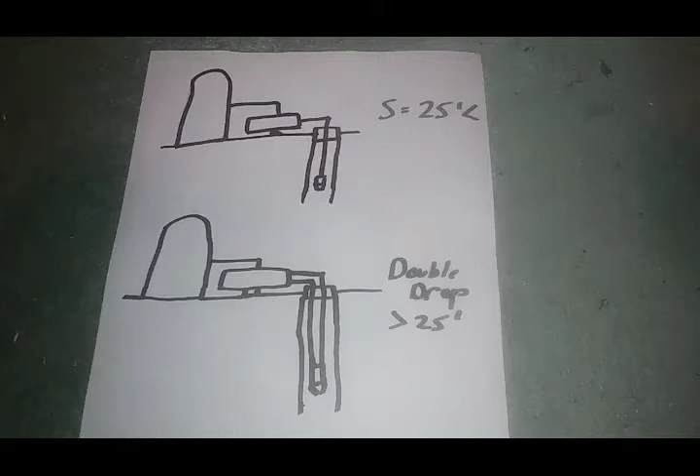All right, here we go again.

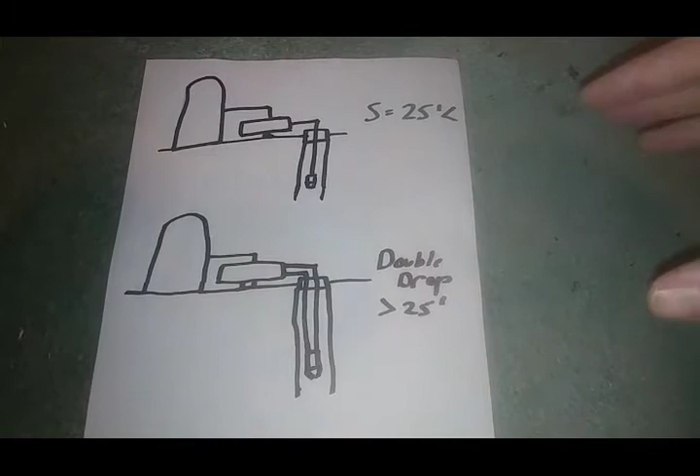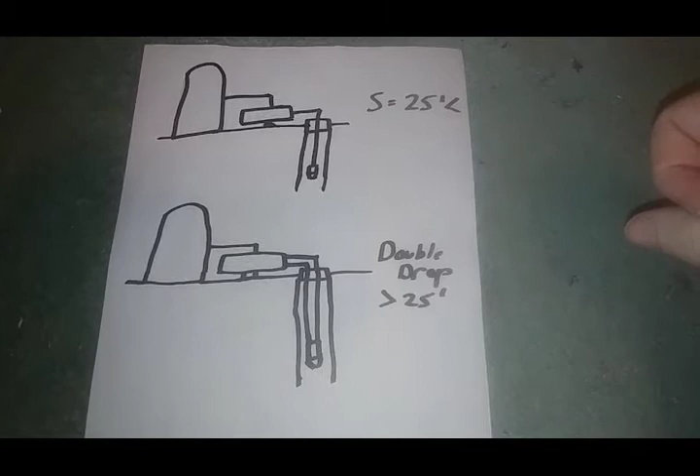So we're going to talk about jet pumps just a little bit. This actually came up today at the counter. I want to thank young Master Dylan Howell for the idea to do this, because a customer had called in and spoke to one of the other guys at the counter about jet pumps, and the topic got brought up. He said, I don't really know how those work. So I kind of walked him through it, and I thought, that's a great idea, I should just do a video on that.

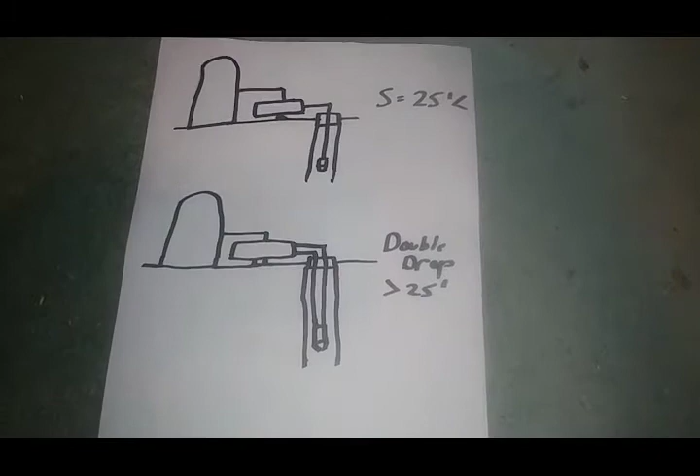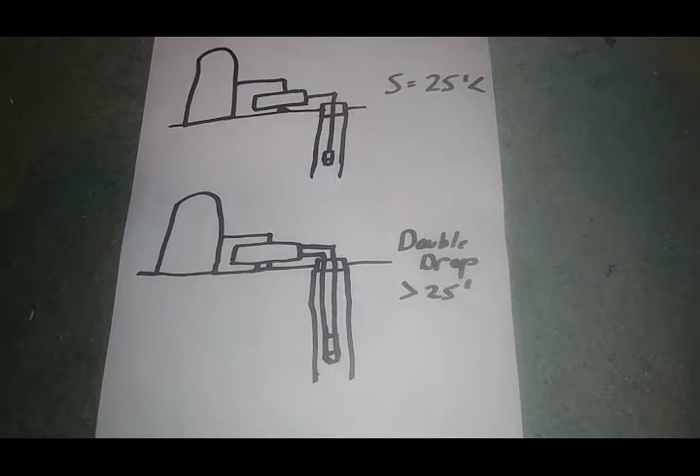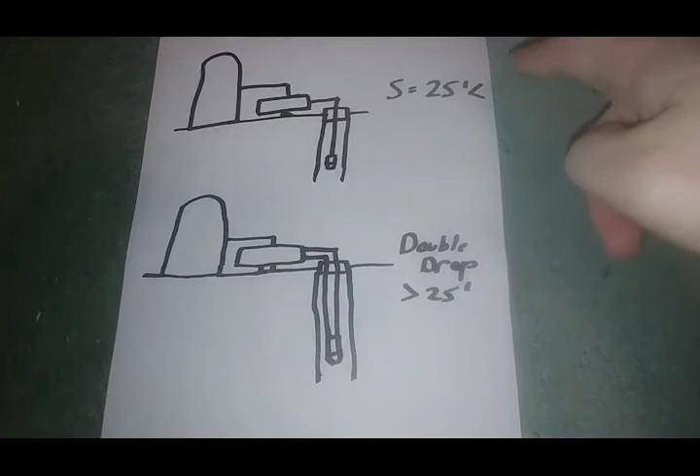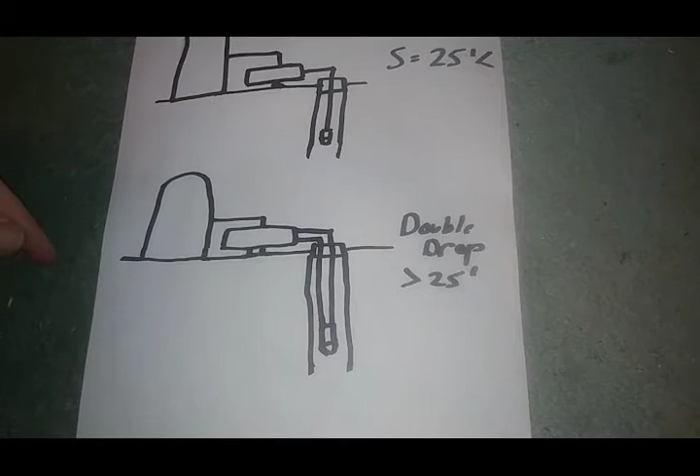The first thing we need to understand about a jet pump is that we live in a world or a reality that is based around physical laws. While we can work around those laws, we cannot break them. When you're dealing with moving water from one place to another, it's much easier to push than it is to pull. So submersible well pumps can be extremely deep in the ground, and you're able to pump water from there without a whole lot of trouble, but that's because the pump is down low and it's pushing. It's much, much easier to push than it is to pull.

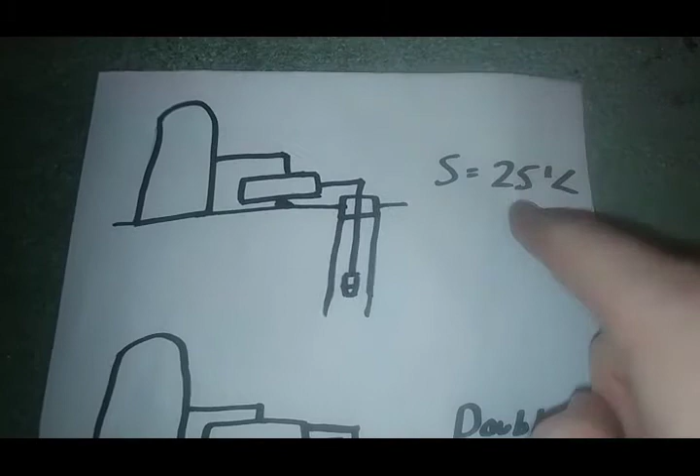So jet pumps come in two varieties. This is a shallow well pump, or shallow well jet pump. The key thing here: less than 25 feet, that is the absolute maximum depth that you can pump water with one of these. Anything deeper than that, this will not work, because again, we live in a reality that is governed by physical laws.

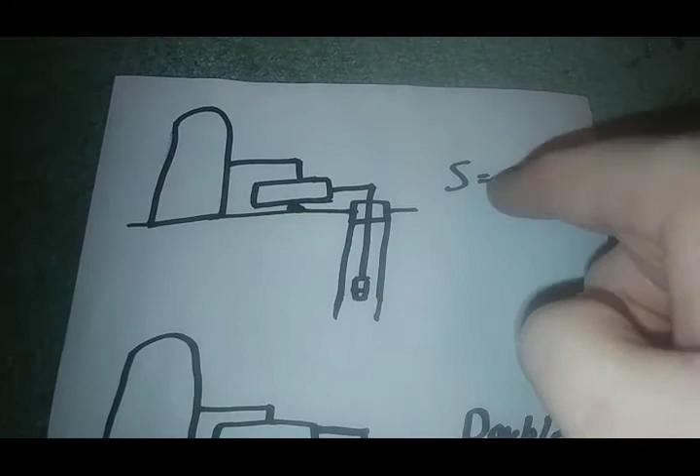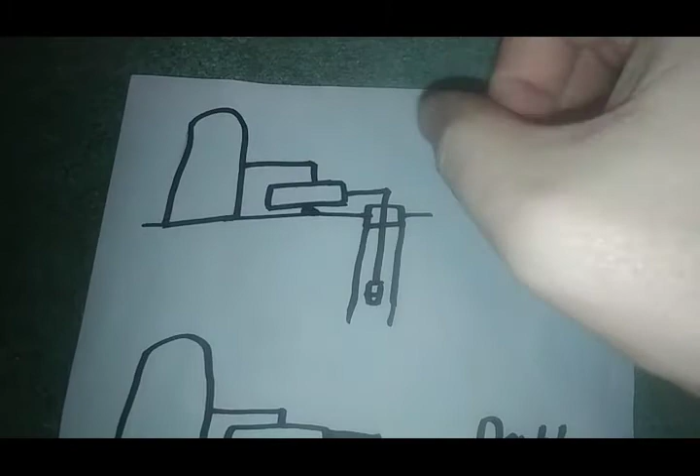So the pump is above ground. This style of pump is called a centrifugal pump, which is just how the motor and the impeller is laid out. That's what determines whether it's a centrifugal or not. And in this picture, that's your tank, your pressure vessel.

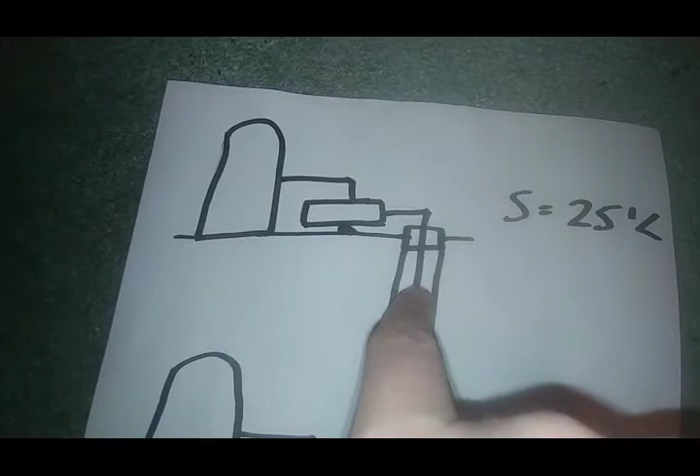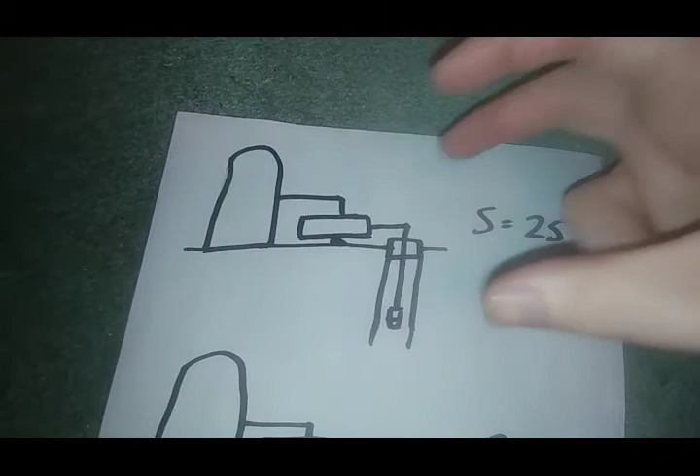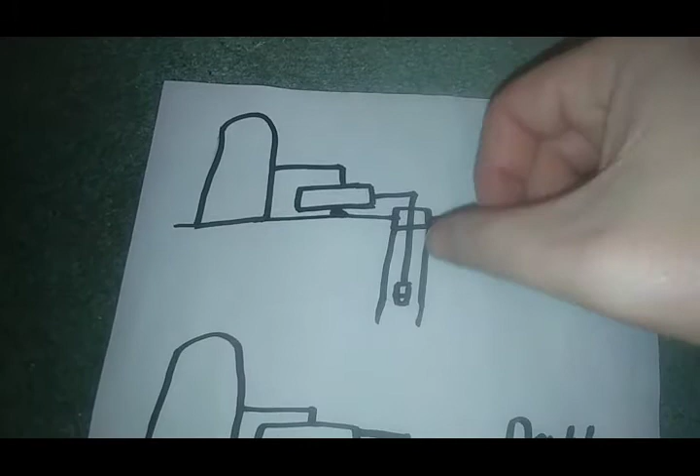There's a line going into it, there's the pump itself, and there's a line going down. That's going down through the well casing into the well seal, into the well casing. And there's going to be a foot valve at the bottom, which if you've ever seen a foot valve before, it's a big piece of brass that tapers down, not to a sharp point, but it tapers down, and there are little holes inside that brass piece. That's a foot valve, that's what those look like. You've probably seen them on the shelf at some point.

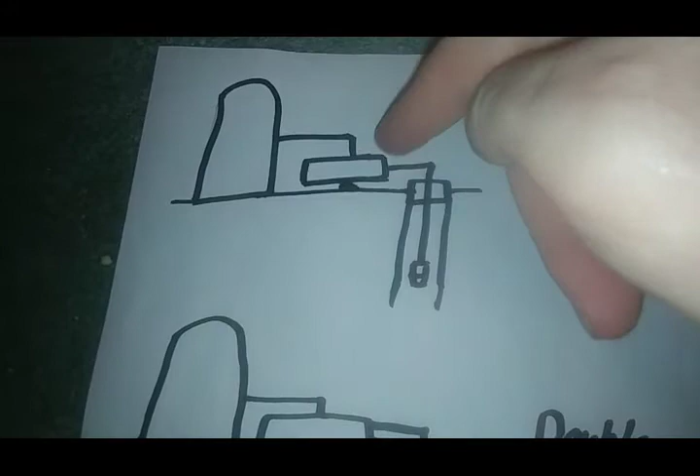Now both of these are jet pumps, but on this one, you've only got one line going into the well. The jet is actually inside the pump itself. So what that jet does is, when the pump is running, water is getting fed into that jet, kind of like a loop almost, and that basically creates a negative pressure inside the pump, which kind of boosts its power in a way. In other words, you're putting a vacuum in this line by using that jet, which lessens the effective head that's having to pump.

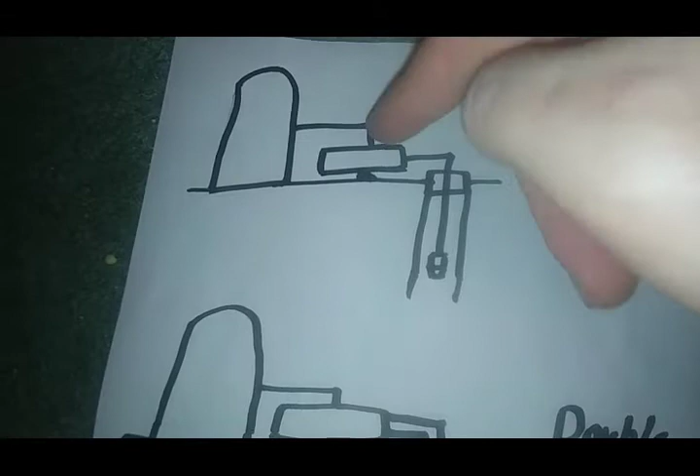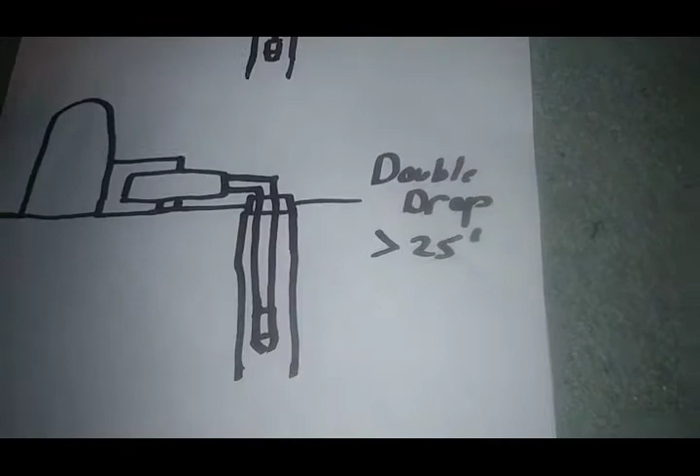These aren't really that common though. You'll see these sometimes, but they're fairly rare. What's more common is what you can call a double drop, or just call it a jet pump. When people talk about jet pumps, 9 times out of 10, this is what they're talking about.

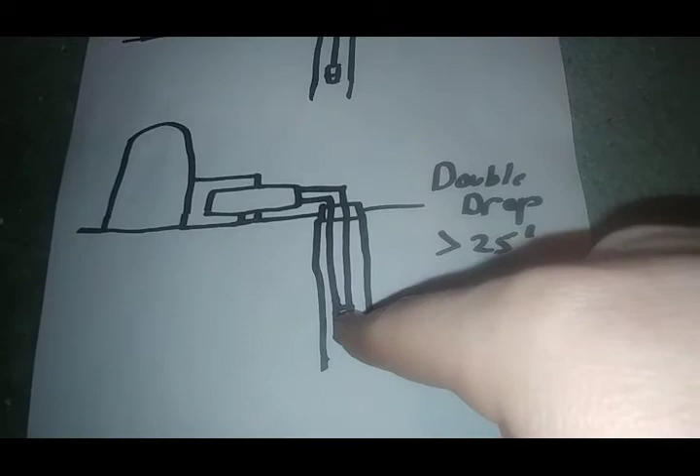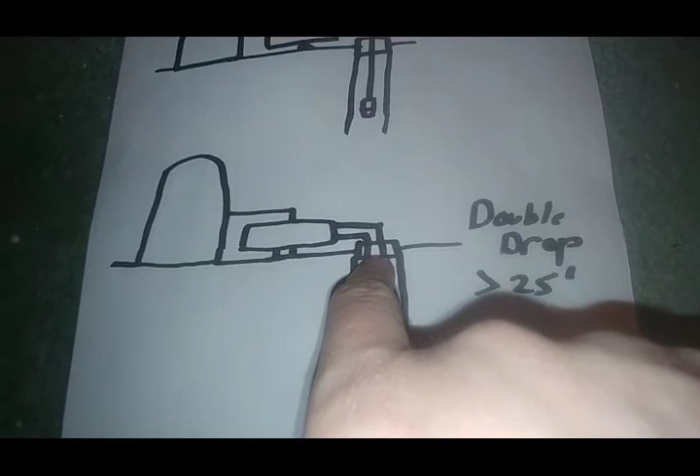The only major difference is, first of all, you can go greater than 25 feet with it. But also, the jet is actually down here. So typically the way this is set up, you've got your tank, you've got your line going from the pump to the tank, and the centrifugal pump is here. You'll have 2 lines coming out. Typically, you'll have a 1-inch line for the jet and a 1.25-inch line for the water being pumped out of the well. And here again, here's your well seal, and here's the casing.

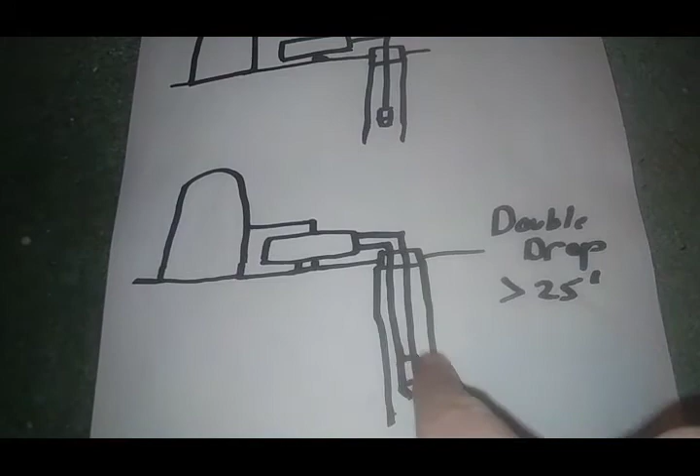Now this foot valve that's down here is special. It's kind of like the other foot valve, but it's shaped a little different because it's got 2 ports on it. That jet that I was talking about up here, it's not in this pump, it's actually down here.

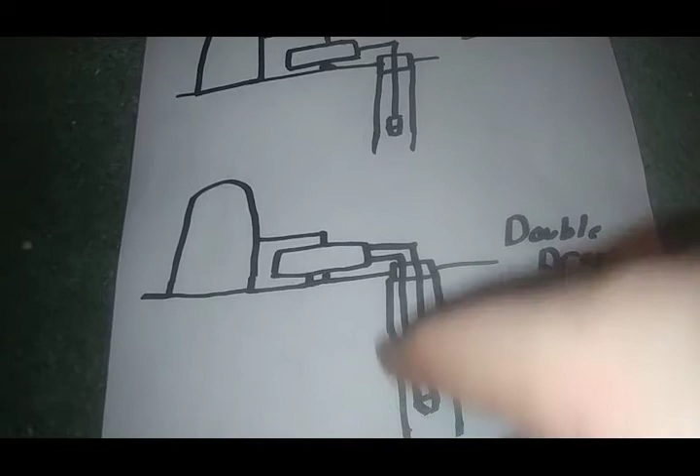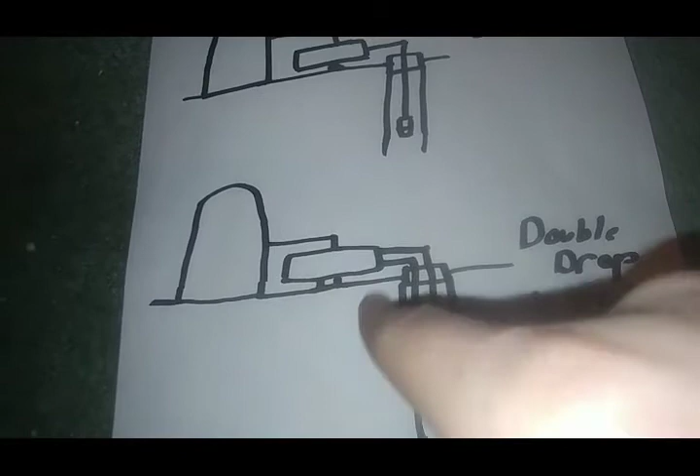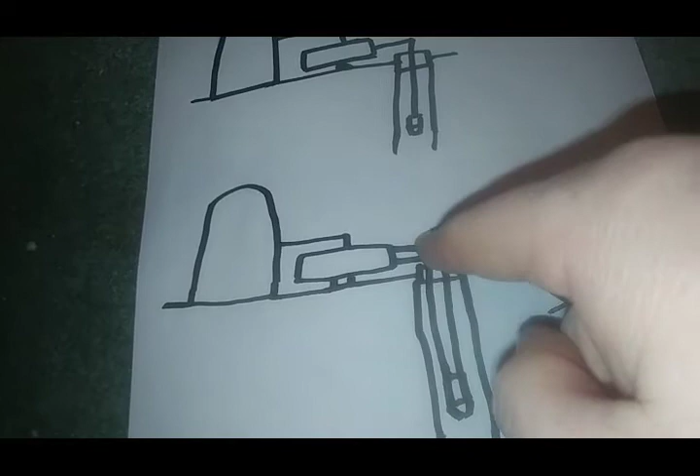The way this thing works, when you're pumping water up out of the well, part of what you're pumping up makes a loop and goes back down. So essentially what this pump is doing is not just pulling, it's also pushing at the same time. That's because it's much easier to push than it is to pull, and that's how it's able to go at much greater depths.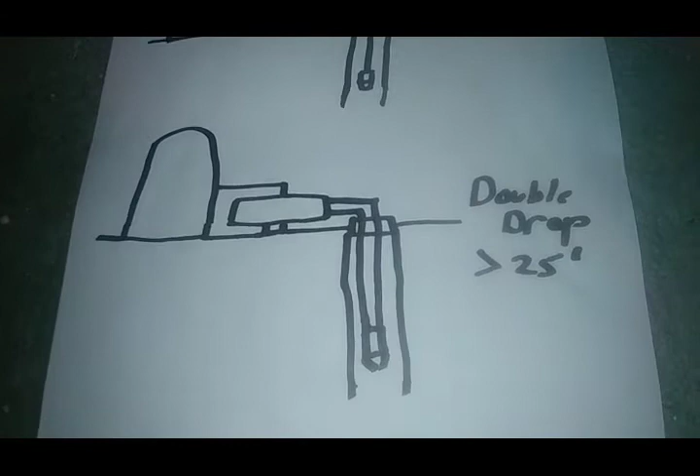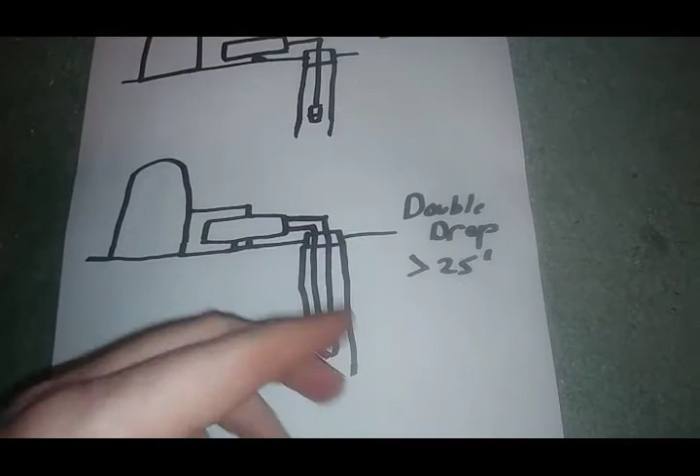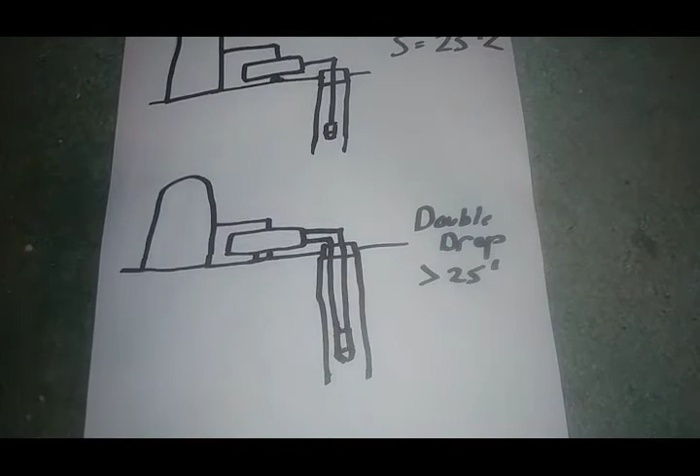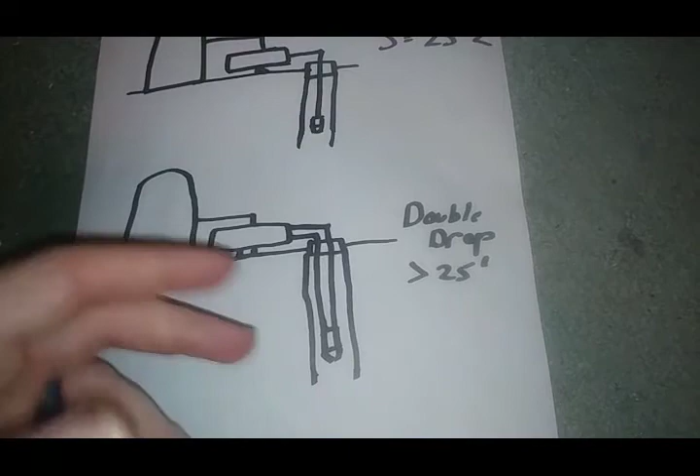That's pretty much all there is to them. As far as installing one of these, one of the major pitfalls is priming them, especially a double drop or one like this. There's a little port on top, and both styles have this port. You crack it open, use a funnel and a bucket, and dump water into it until it overflows. Plug it back up, put power back on the pump, and let it run until it starts whining—it'll make kind of a shrill sound, a very distinct change. Then open that port back up, pour more water in, and close it back up, because you're priming these lines, especially the jet line.

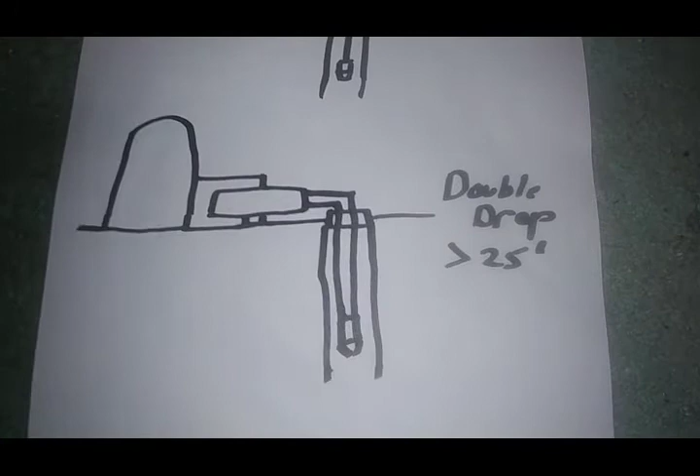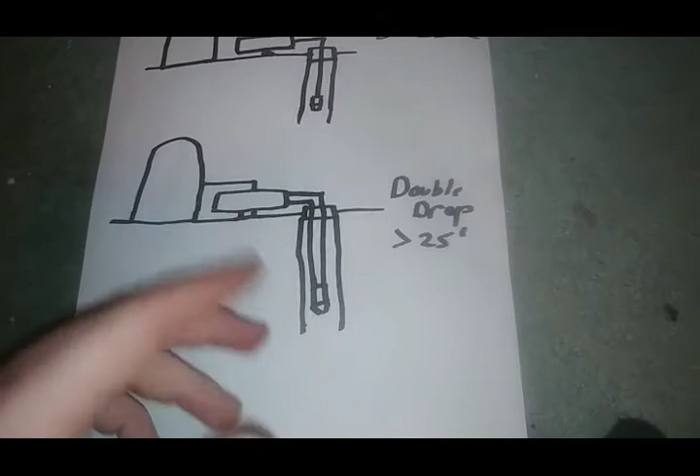Sometimes these things can be a bugger to prime. A lot of times when laymen install these, they won't properly prime it. They'll burn it up and bring it back wondering why we sold them a bad pump, but that's not the case at all—it's because they didn't properly prime it. It can take quite a long time to prime one. The longest one I've ever had to prime took nearly 2 hours to get it fully primed. I don't like messing with these, I really don't, just because of that. It's very time consuming to get these set up and running right.

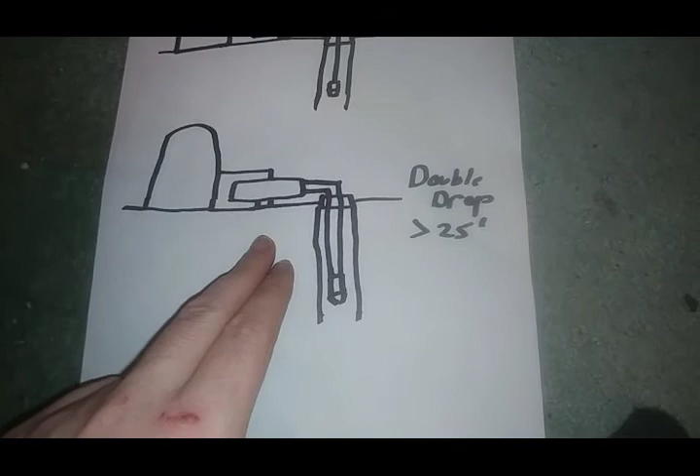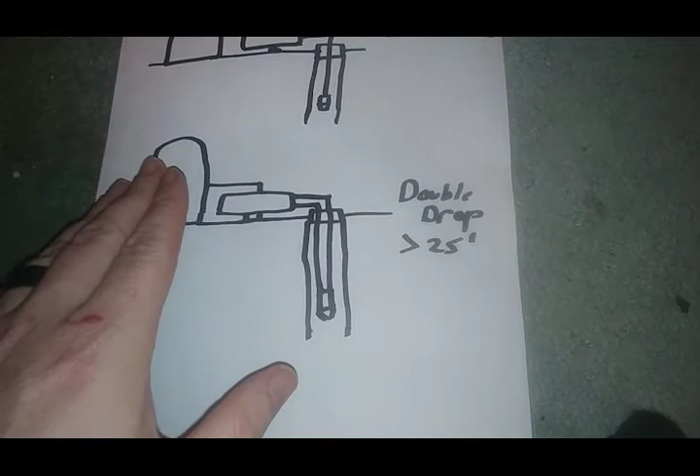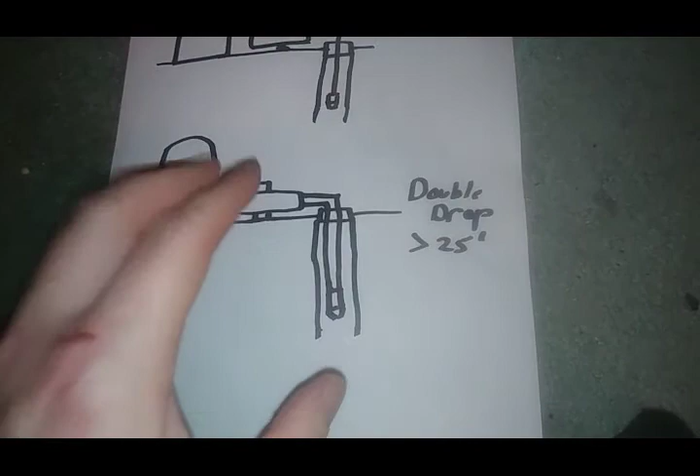If you do sell one of these, just be very, very careful. I don't even like sizing them—I know how to, I just don't like doing it. If it's a layman who doesn't know what they're doing, I make it very clear to them that they need to properly prime it, and that I need to see a picture of the data plate of the original pump or some documentation showing what kind of pump they had before I'll even go near it.

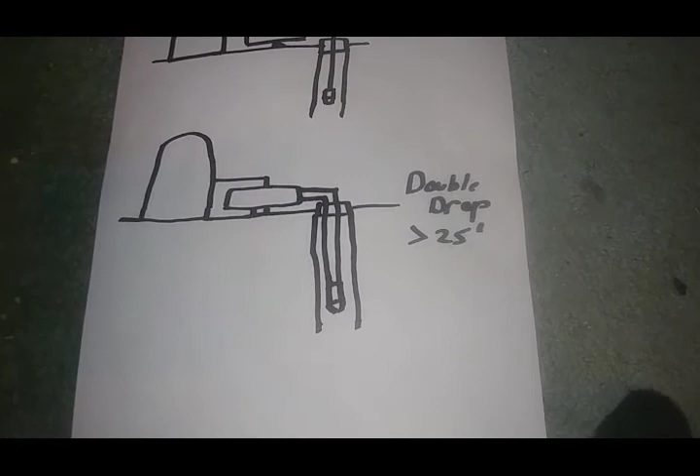Because these things are really easy to burn up if you don't prime them right or if they're not sized right. A submersible pump, it's not really a safety factor, but because of the nature of the pump and the way it works, you've got a little more leeway in each direction of being more pump than you need or not enough pump. And they're significantly easier to prime—you just crack a valve, turn it on, and wait.

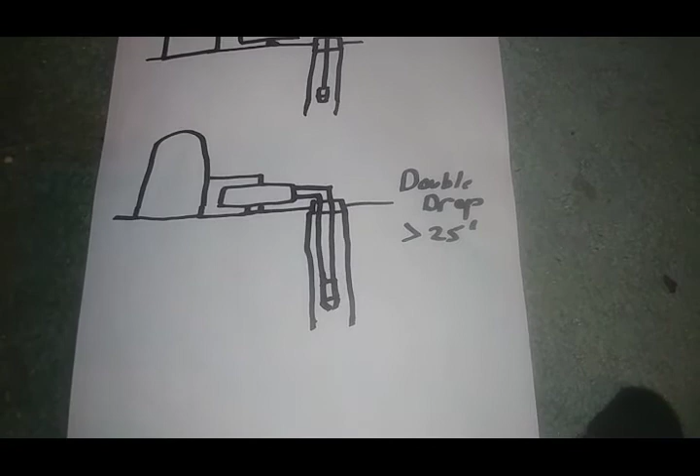This is much, much more involved. So just be very, very careful with these, and make it abundantly clear to the customer that if they don't know what they're doing, they shouldn't be messing with it. This is not really a DIY friendly thing to install.

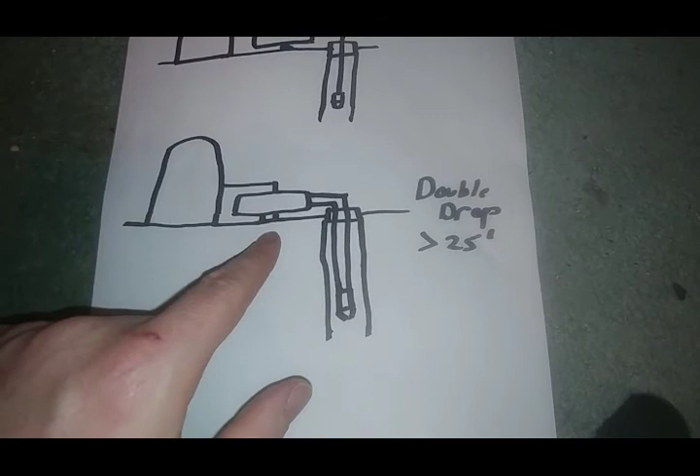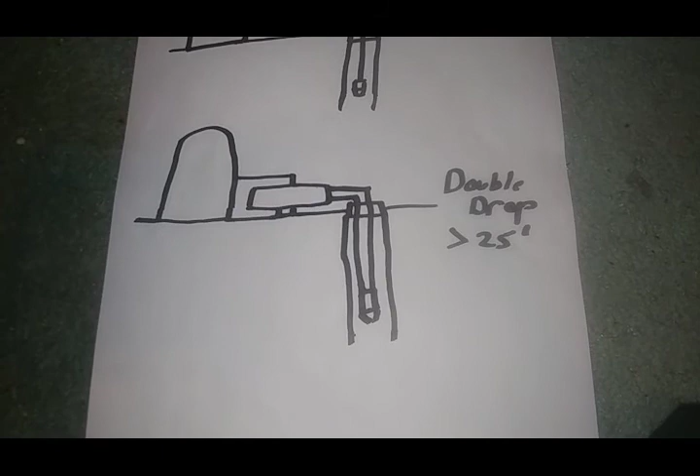So that's about it. I can't think of anything else I want to cover on that. But just like I said, just be careful with these. And if you guys have any questions, let me know.